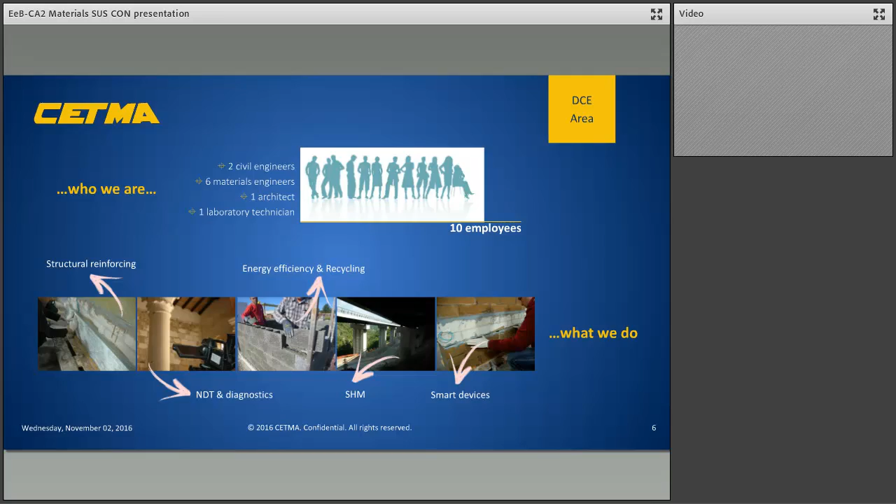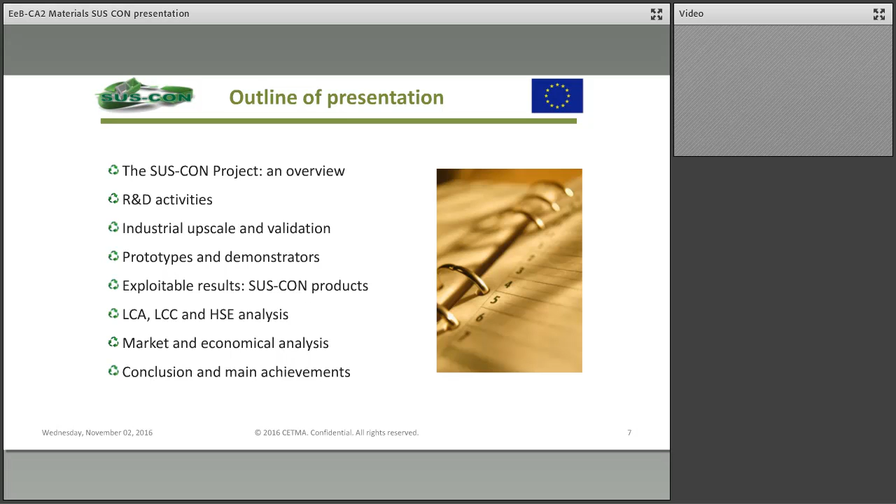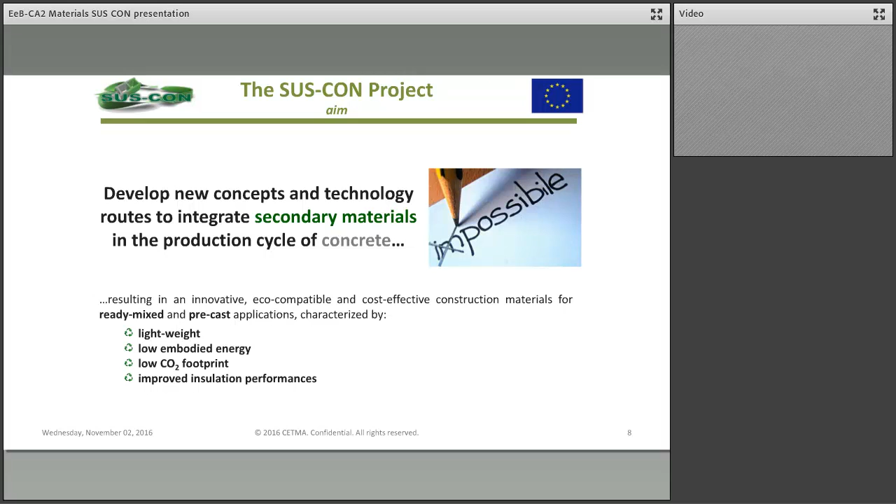What's the aim of the Suscon project? The aim was to develop new concepts and technologies to integrate secondary raw materials into the production cycle of concrete. This will result in a construction product usable for ready-mixed and precast applications, characterized by lightweight, low embodied energy, low CO2 footprint, and improved insulation performances.

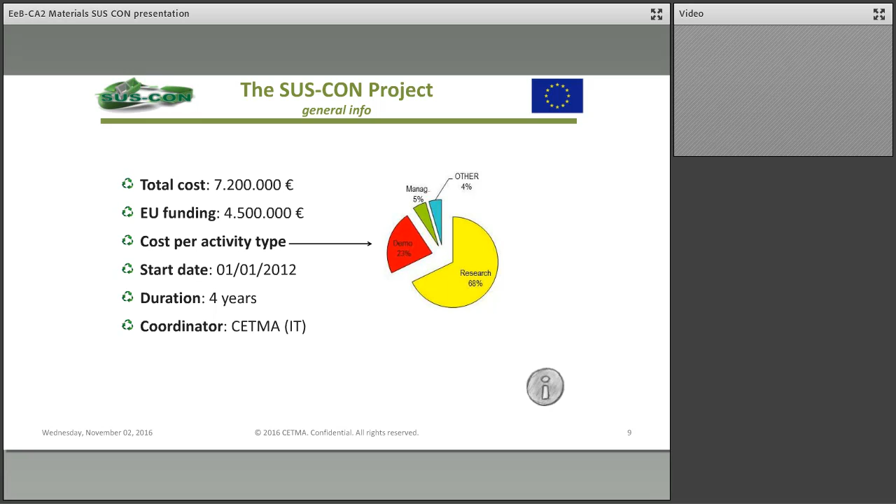Some general information: the project started in January 2012 and lasted 4 years, ending in December 2015. The total budget was about 7 million euros, with 4.5 million euros funded by the European Commission, and it was coordinated by CETMA.

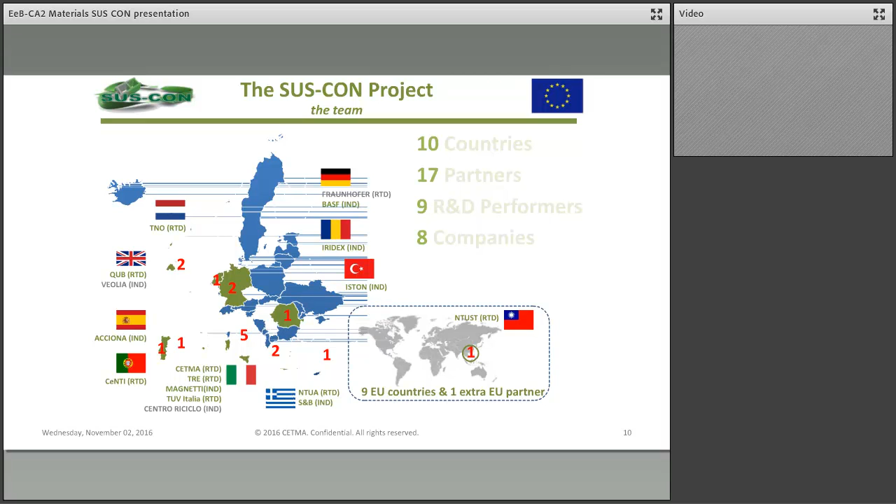We were 17 partners coming from 10 countries, 9 EU countries and 1 extra-EU country, with 9 R&D performers and 8 companies.

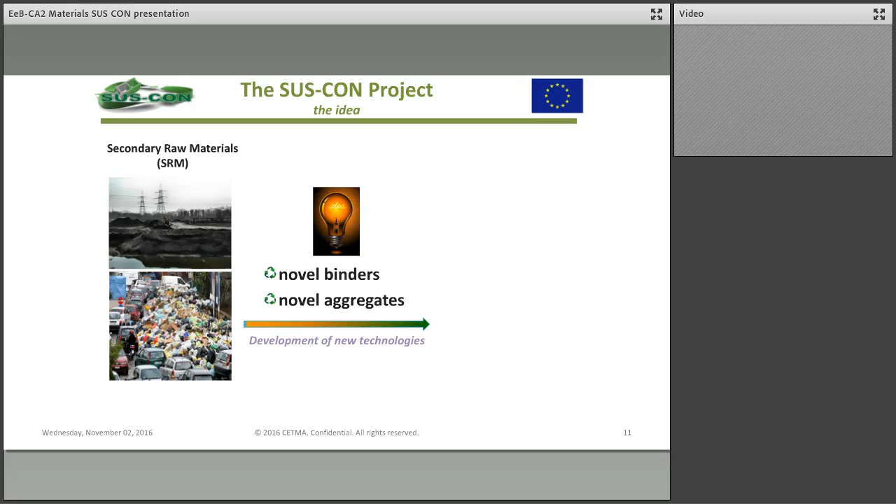So the idea of the SUSCON project was to take secondary raw materials, develop new technology to process and transform such secondary raw materials into novel binders and aggregates, and then combine such novel binders and aggregates from secondary raw materials into a sustainable and energy efficient lightweight concrete.

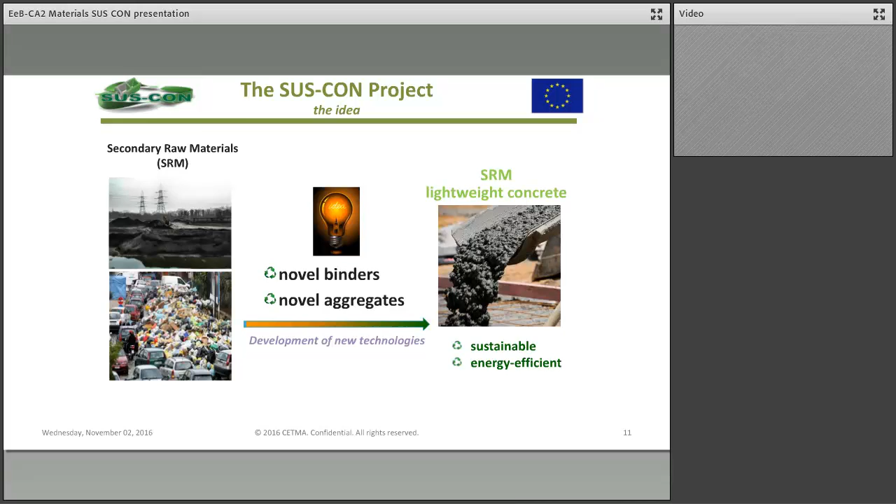The challenges of the SUSCON project were very ambitious: a 50% reduction of embodied energy, mainly through substitution of traditional binder with binder coming from secondary raw materials; improvement of insulation properties thanks to the use of lightweight aggregates; reduction of the CO2 footprint up to 50% thanks to the use of secondary raw materials; and as a consequence, cost reduction and development of 100% eco-sustainable concrete made with secondary raw materials.

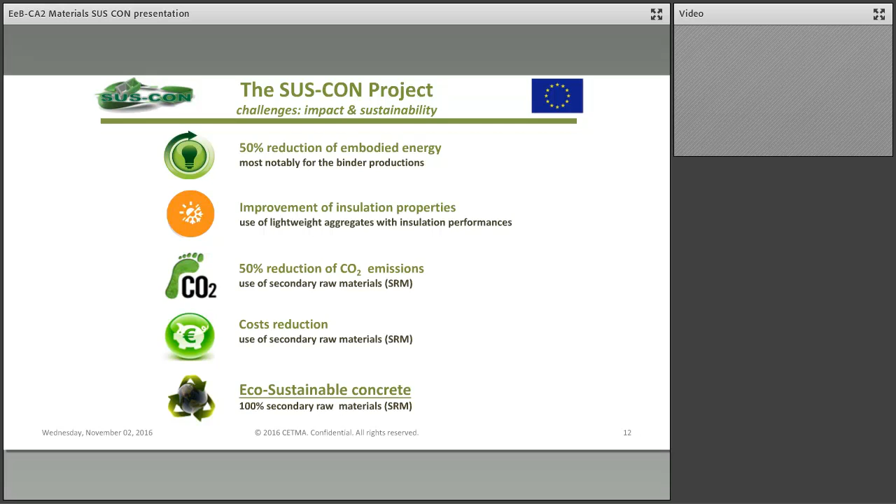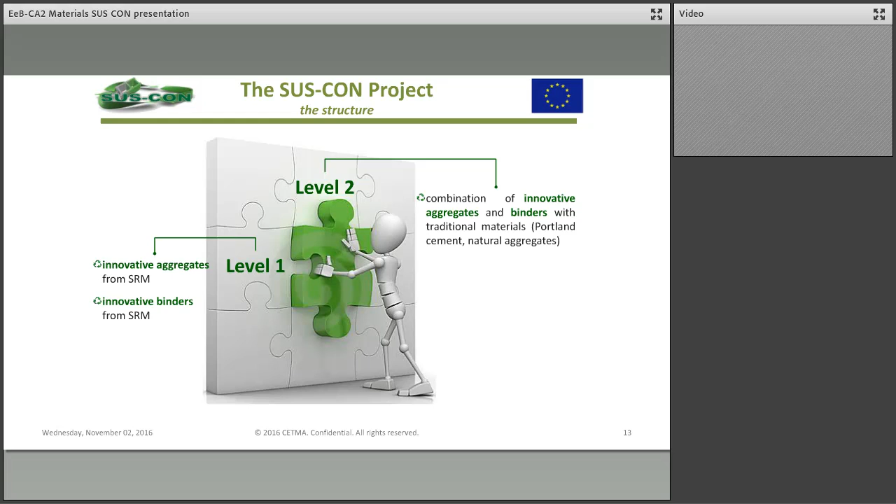The project was structured in 3 levels. The first level was about the development of innovative aggregates and innovative binder from secondary raw material. The second level was about the combination of innovative aggregates with traditional binder, and the combination of innovative binder with natural aggregates. The third level was about the combination of innovative aggregates and innovative binder from secondary raw materials into an eco-sustainable concrete made with up to 100% of secondary raw material.

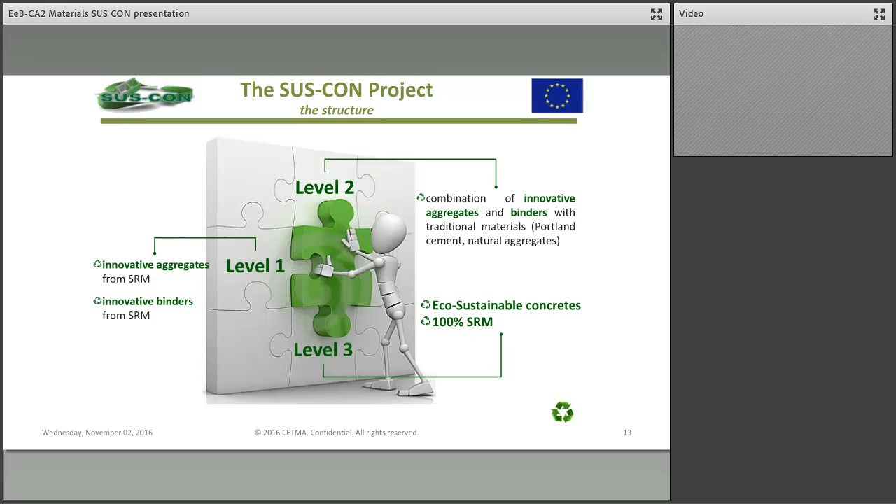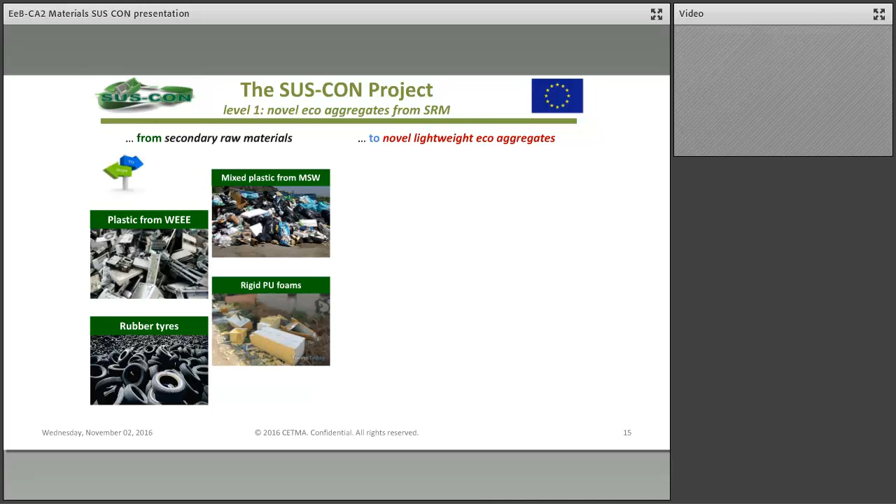Let's go through the development of novel eco-aggregates and binder from secondary raw material. What we have done: we have taken secondary raw material, usually landfilled or incinerated, and developed new technologies and processes to transform such secondary raw materials into lightweight aggregates with improved insulation performances, as you can see here.

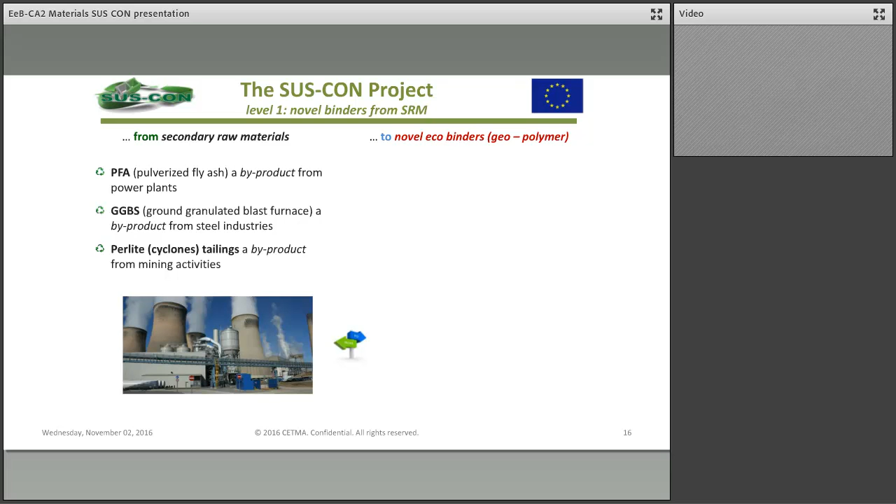We have done the same also from the binder side. We have taken some industrial byproduct, so PFA, GGBS, and perlite tailings, and again developed technologies and processes to transform such secondary raw materials into novel eco-binder, what we call geopolymers, that can be used for the replacement of traditionally ordinary Portland cement because of their cost effectiveness, low energy consumption, and reduced CO2 emission.

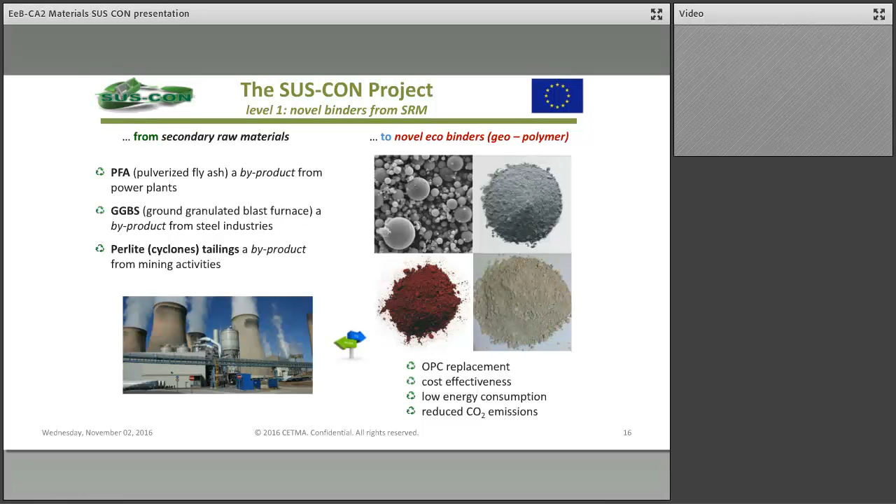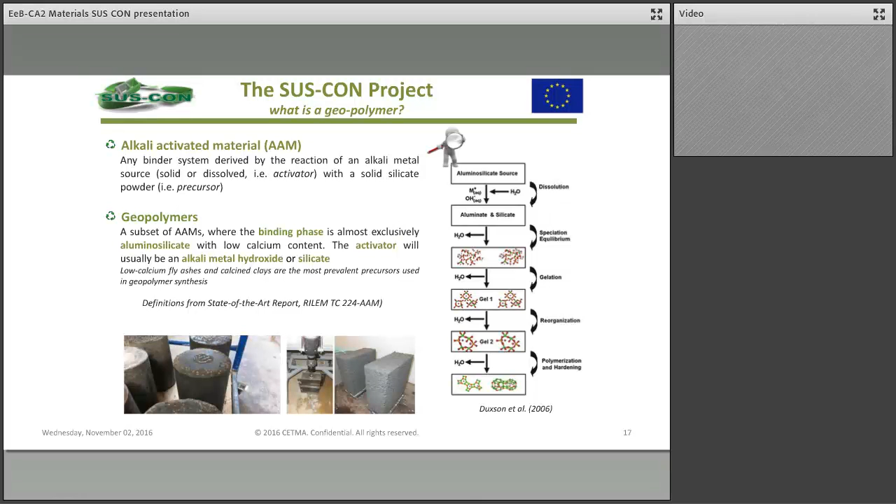Let's do a step back about what is a geopolymer. A geopolymer is a subset of the alkali activated materials, where for alkali activated materials we call any binder system derived from the reaction of an alkali metal source, the so-called activator, with a solid silicate powder, the so-called precursor. A geopolymer is a subset of the alkali activated materials, where the binding phase is typically aluminosilicate with low calcium content, and the activator is usually an alkali metal hydroxide or silicate.

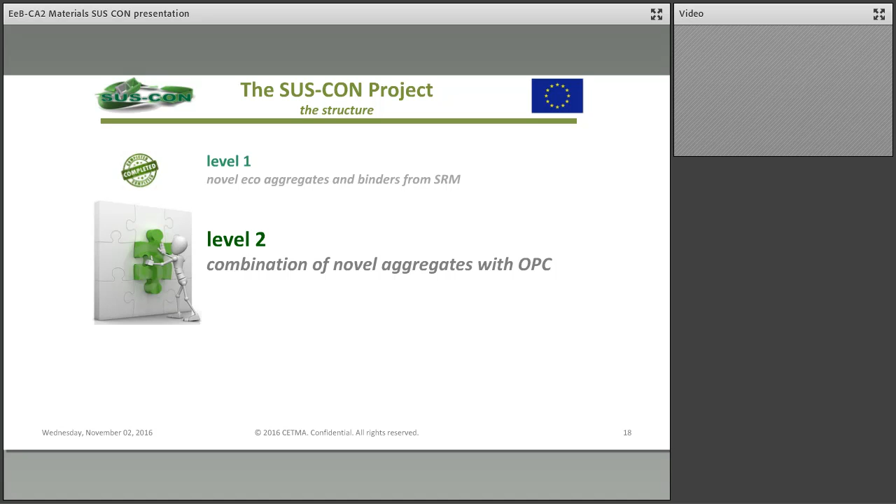After the development of eco-aggregate and binder from secondary raw material, the next step was the combination of a novel aggregate from secondary raw material with ordinary Portland cement.

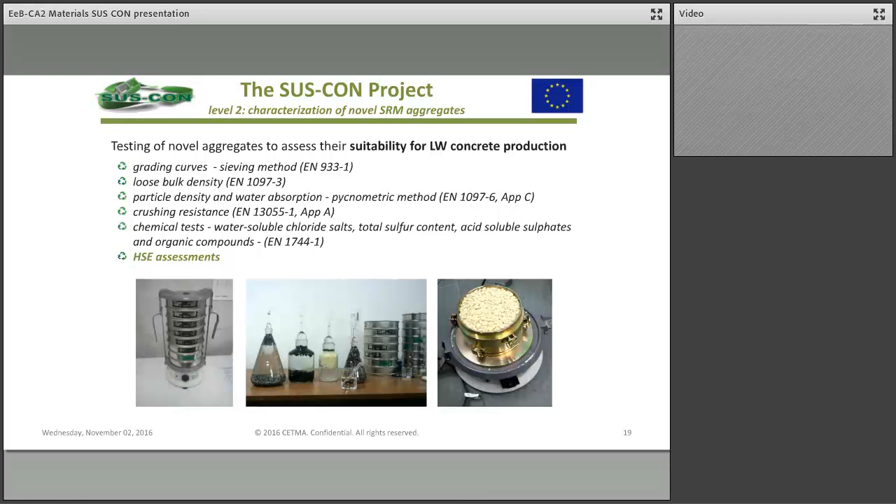What we have done: first of all, we have tested the suitability of lightweight aggregates from secondary raw material for the production of lightweight concrete. So we have performed a lot of physical and mechanical characterization, as well as also health safety environmental assessment of the process and product.

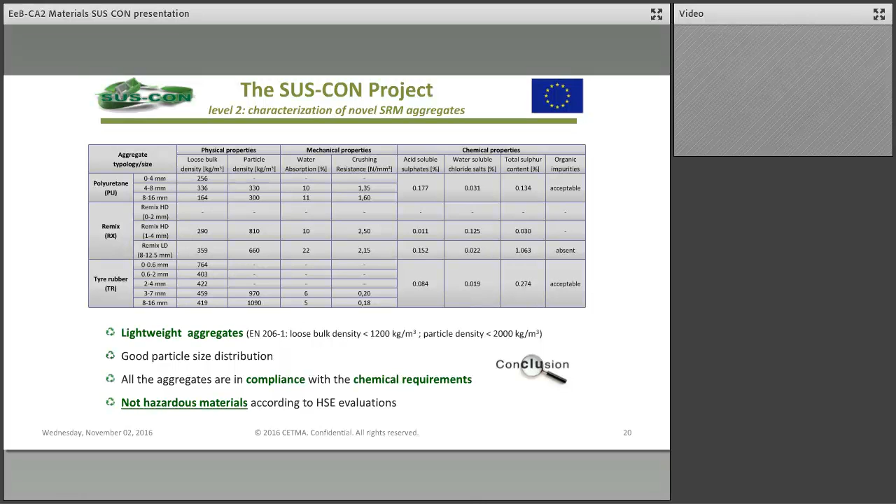This table summarizes the main results, but without going so much in the detail. Each aggregate resulted as lightweight with a good particle density, that is essential for a good mix design. Aggregates from secondary raw material also resulted in compliance with chemical requirements and not hazardous in terms of HSE, and this also is a crucial point for a future use in a real application.

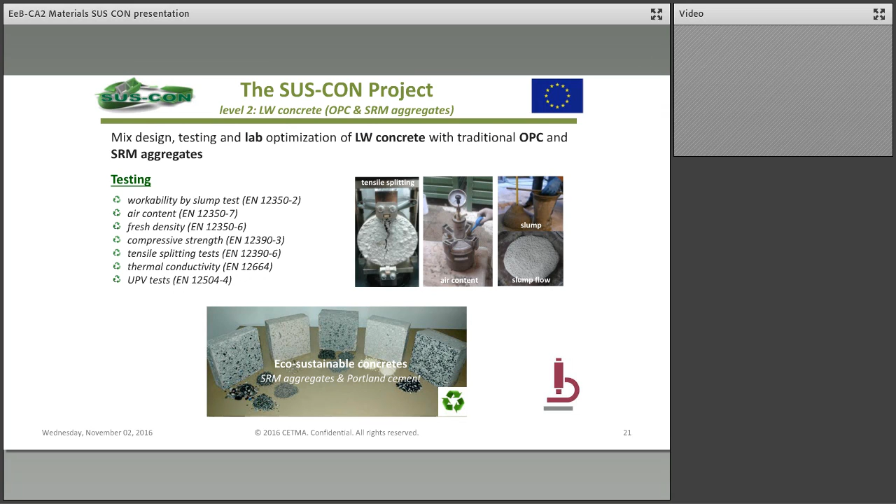Afterward, several lightweight concrete with aggregates from secondary raw material and ordinary Portland cement were designed and tested in terms of workability, air content, fresh density, compressive strength, tensile splitting strength, thermal conductivity, and the UPV test. At the end, we were able to develop at the lab scale some eco-sustainable concrete made of secondary raw materials and ordinary Portland cement.

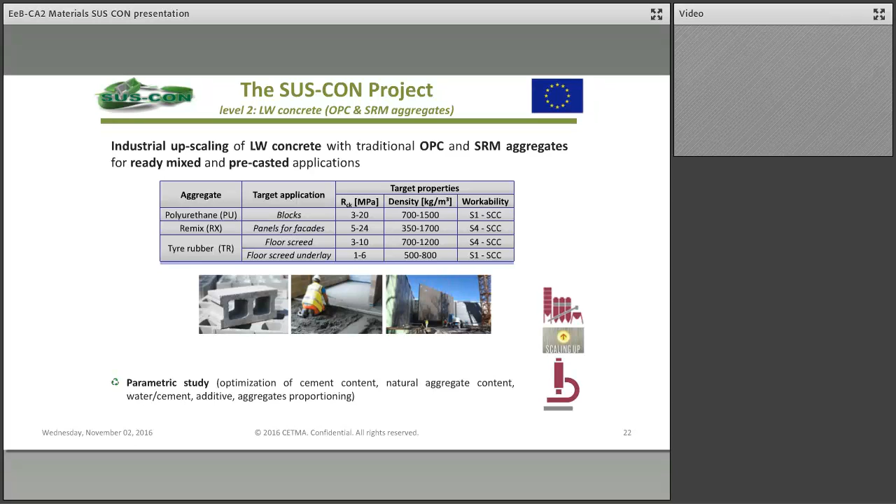Next step was the industrial upscaling of lightweight concrete made of traditionally ordinary Portland cement and aggregates from secondary raw materials for ready mixed and precast application. At this aim, we set the target performance that we have to obtain for target applications that were blocks, panels, screed, floor-screed and floor-screed underlay. A parametric study was performed in order to optimize cement content, aggregate content, water to cement ratio, additives, aggregates proportioning, and so on.

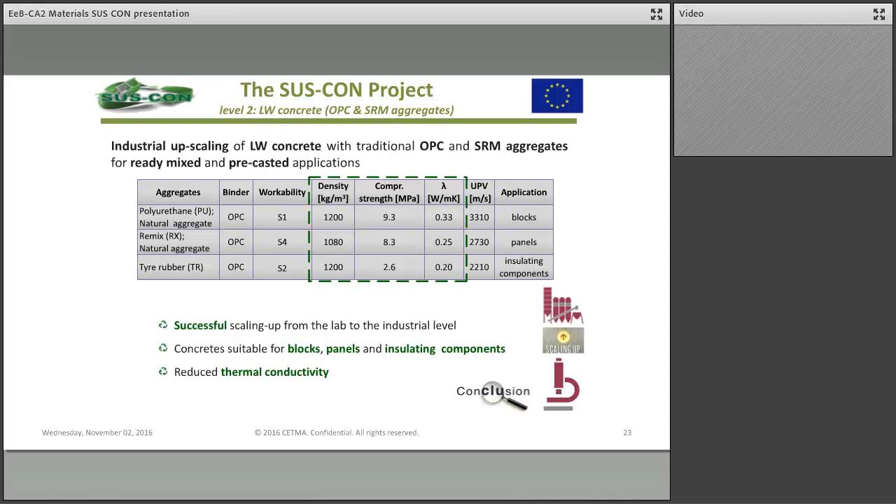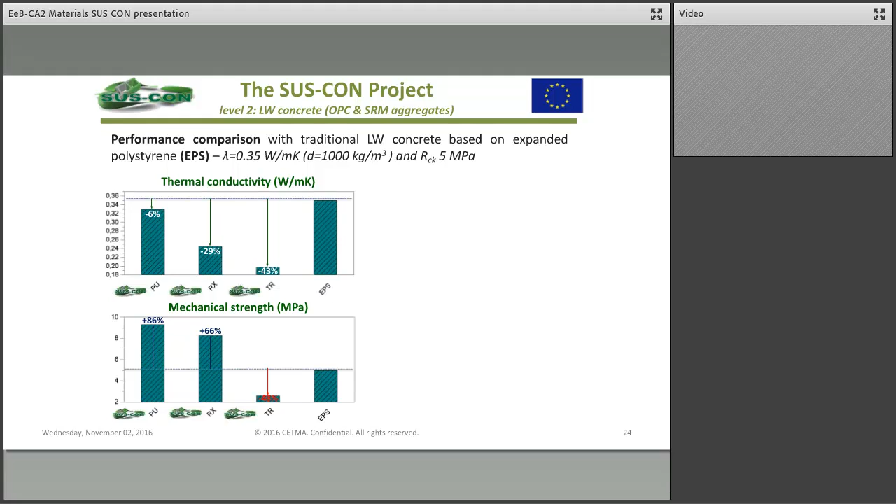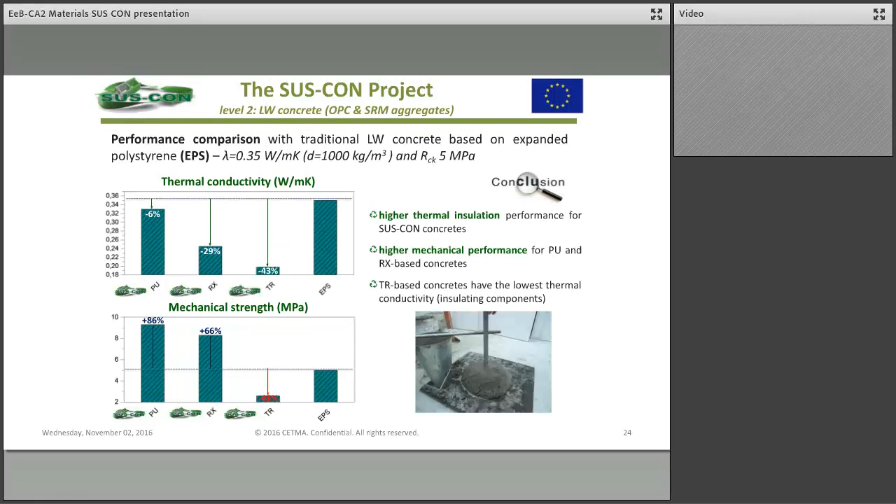In order to evaluate how good were the performances of our lightweight concrete with secondary raw materials, a performance comparison with traditional lightweight concrete based on expanded polystyrene was performed. As you can see in this picture, lightweight concrete with secondary raw materials aggregates resulted in higher thermal insulation properties up to 43%, and their mechanical performances up to 86% for a concrete based on polyurethane and mixed plastic scrap.

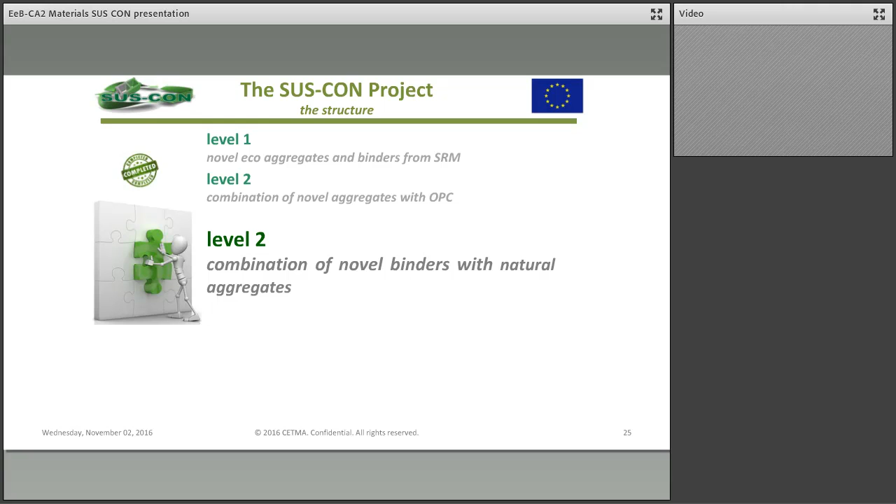The next step was to check the suitability of the novel binders from secondary raw materials to be used with natural aggregates. At this aim, physical and mechanical and chemical characterization of binders were performed, aiming to investigate the potential for geopolymerization.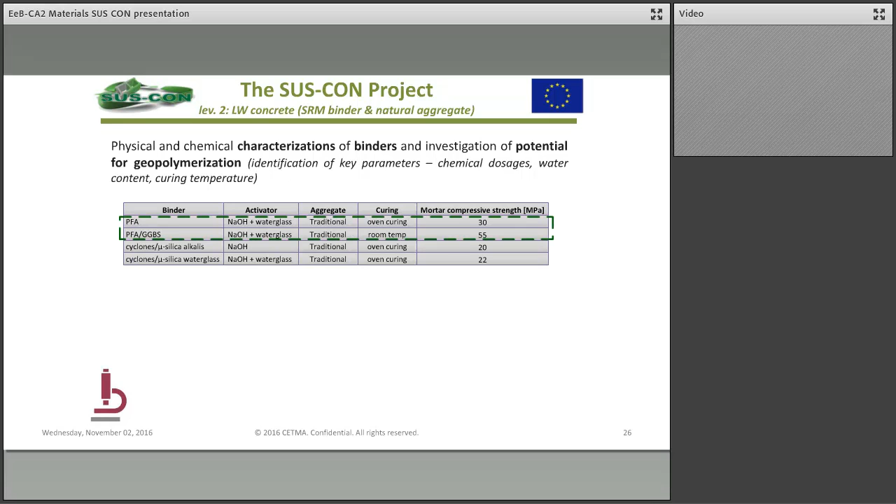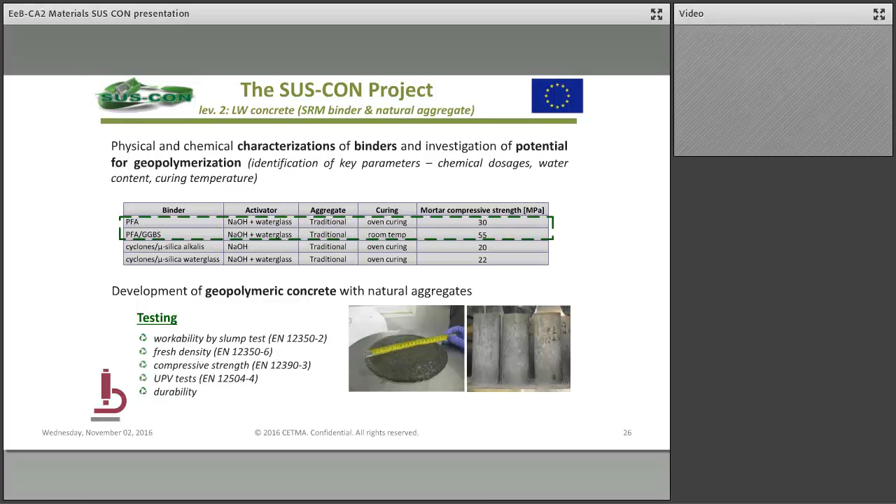A lot of tests were made in order to identify the process parameters for geopolymerization, and this was the main obtained results for PFA and GGBS based binders. We then developed a geopolymeric concrete made with binder from secondary raw materials and natural aggregates, and tested them in terms of workability, fresh density, compressive strength, UPV test, and durability.

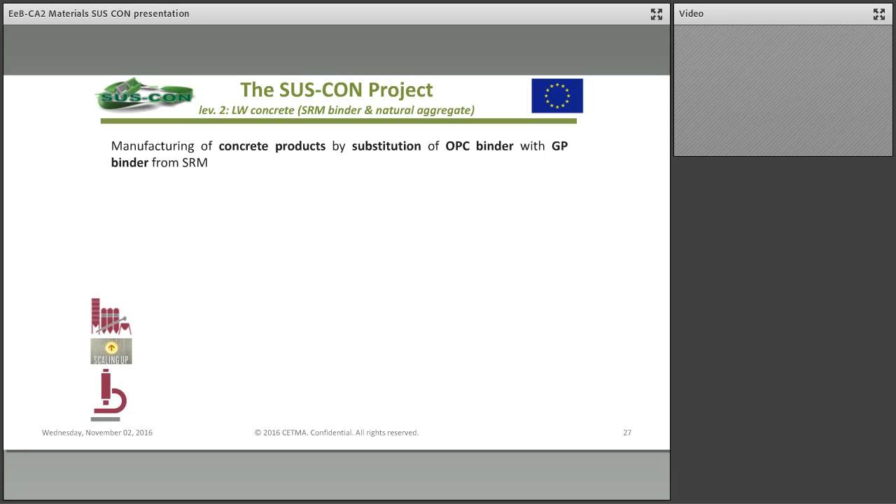Also in this case, we evaluated the chance to upscale such concrete from the lab scale to the industrial plant. Several concrete products were produced by substituting ordinary Portland cement binder with the SUS-CON binder from secondary raw material for applications like facade panel, building blocks, and aerated autoclaved concrete. As a result, the replicated concrete products were fully conformant to existing technical prescriptions.

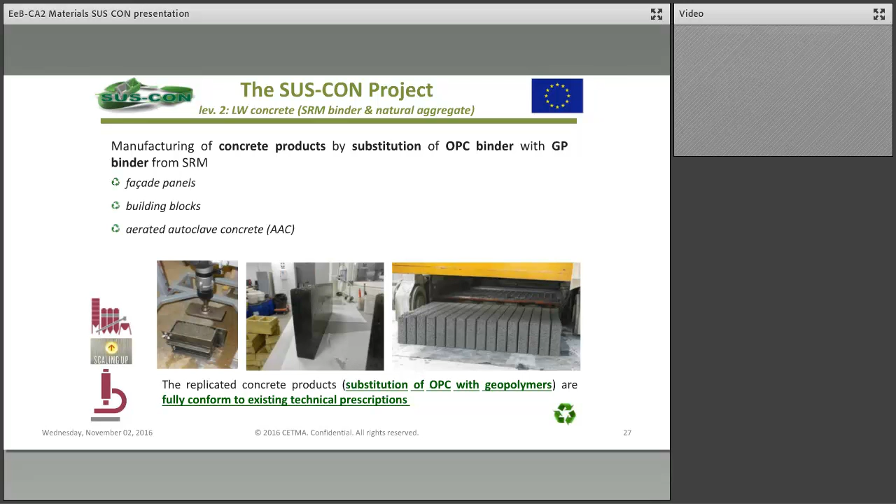At the third level, after the development of the novel eco aggregates and binder from secondary raw material, and the combination of novel aggregates with ordinary Portland cement and of novel binders with natural aggregates, the final step was to combine aggregates and binder from secondary raw material in an eco-sustainable concrete with 100% secondary raw material.

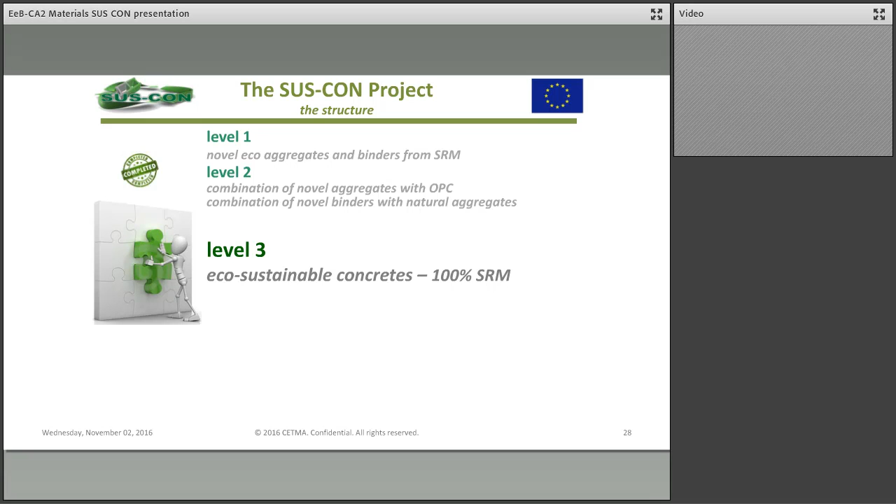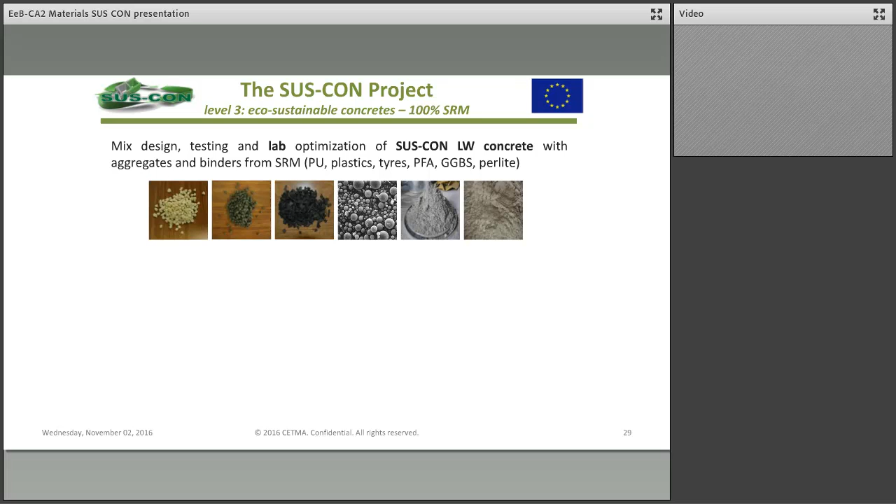So SUS-CON lightweight concrete with aggregates and binder from secondary raw material were designed and tested, targeting specific products like screed, blocks, and panel.

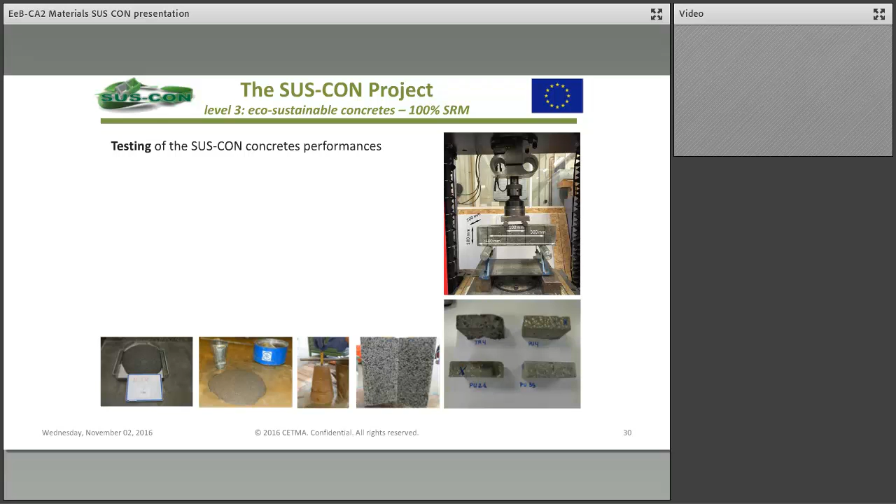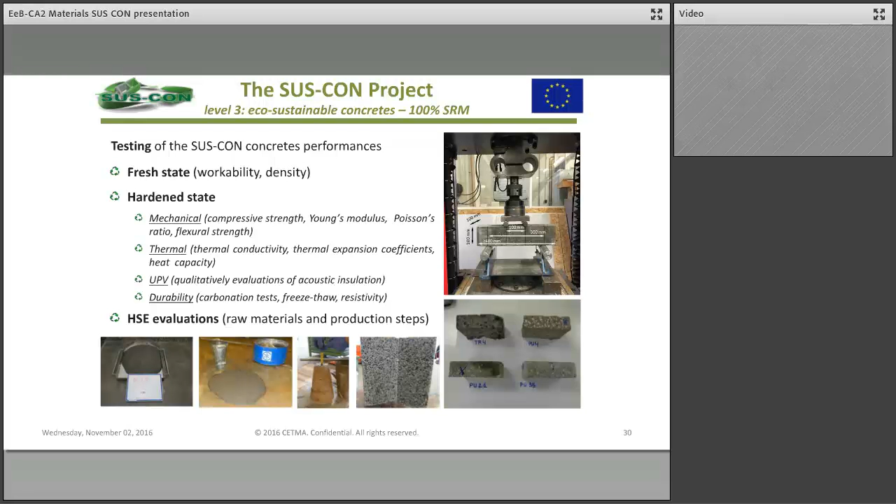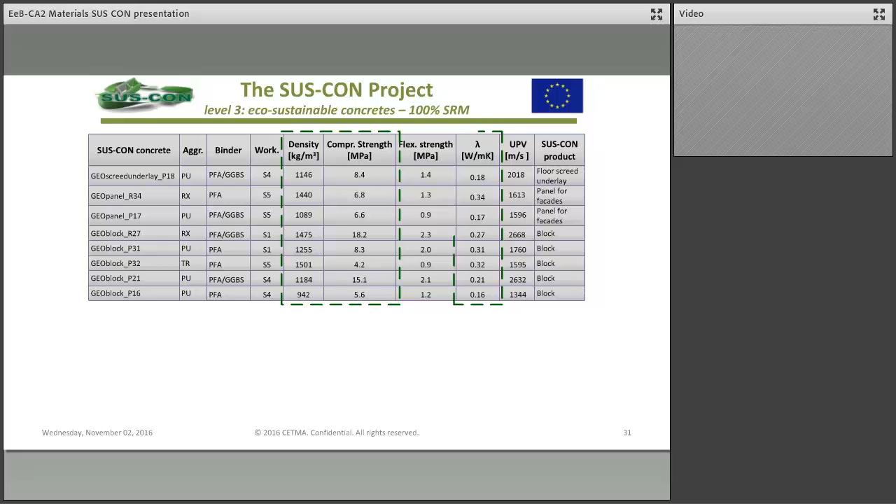These are the main results we obtained on the Suscon products. Very good results were obtained both in terms of compressive strength, up to 18 megapascal, and thermal insulation properties, as low as 0.16. So, innovative concrete based on 100% secondary raw material from both the aggregates and the binder side were successfully optimized for ready-mix and precast application and resulted in improved insulation performances, and also resulted as not hazardous after an HSE analysis of raw materials and production processes.

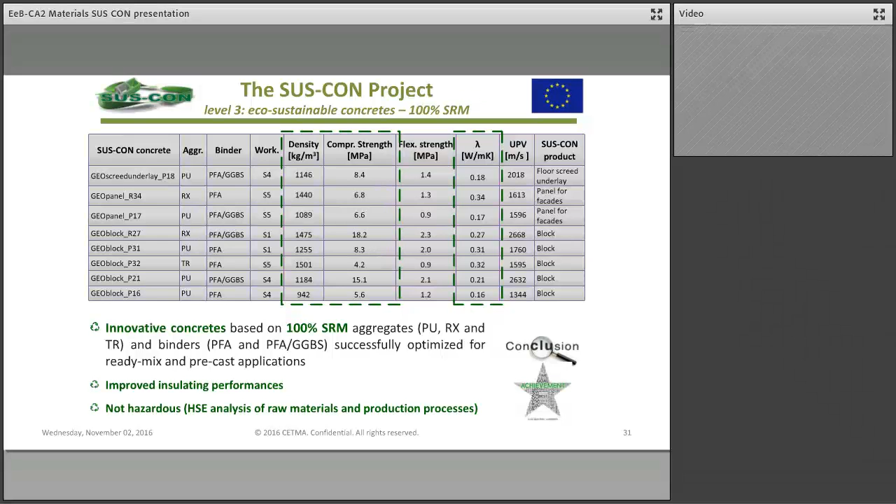Afterwards, several Suscon precast components, blocks and panels, were manufactured in the plant with the aim of testing the performances in terms of mechanical resistance, thermal and acoustic insulation, and fire resistance.

One of the main achievements of this upscale was that the Suscon product production is highly compatible with existing concrete production processes, so minimized equipment costs are required.

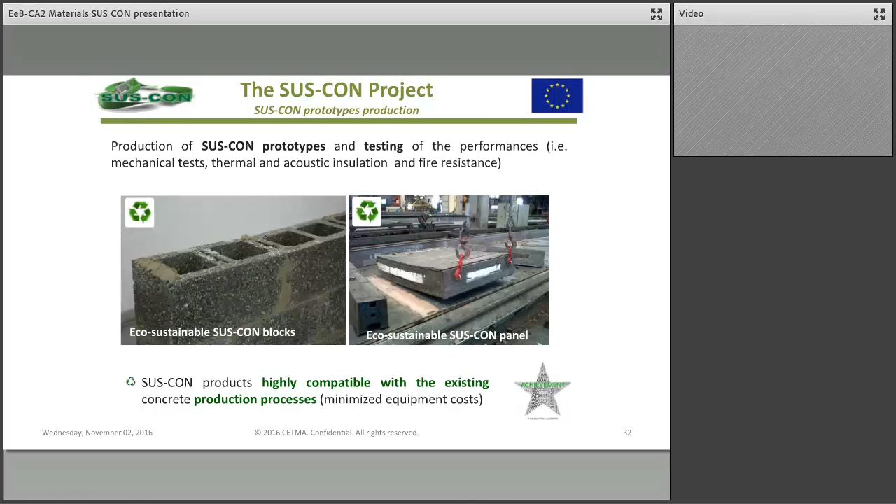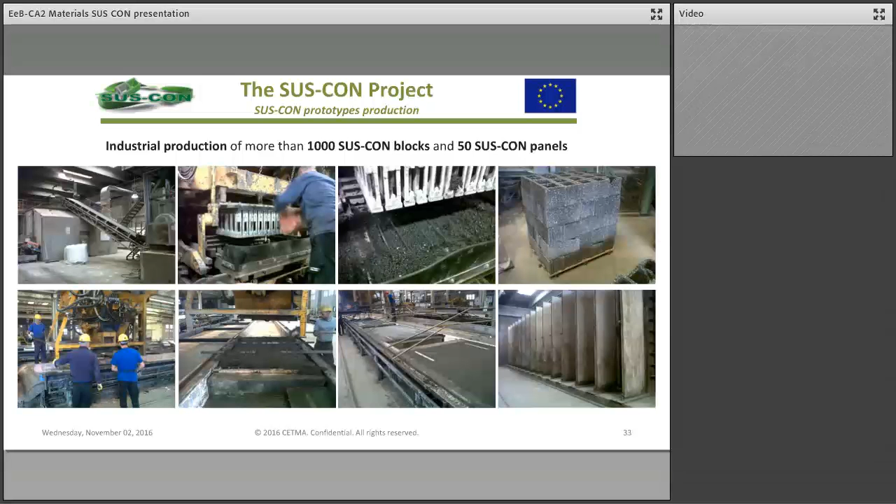In terms of characterization of such prototypes, we found that the Suscon blocks have a reduced U value that is half of the reference commercial block, and the Suscon panels have an improved fire resistance that is 4 times higher than the reference commercial panel.

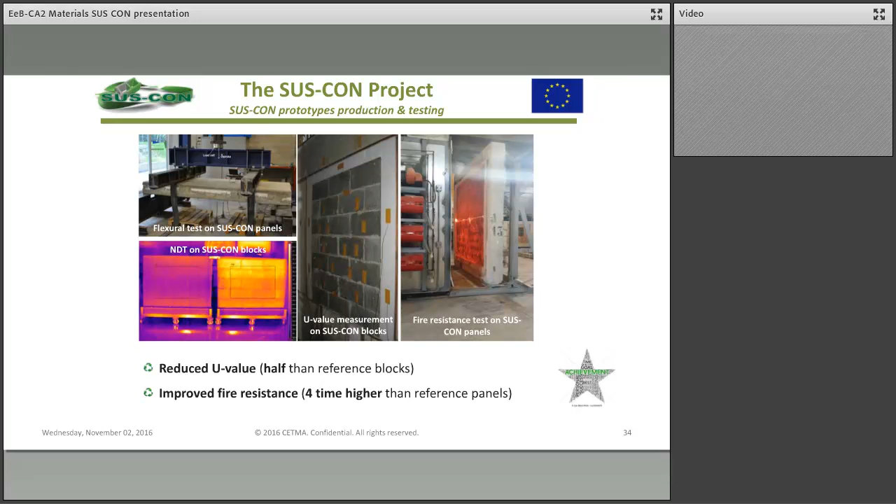Suscon panel have fire resistance that is EI 240, while reference commercial panel have a fire resistance that is EI 60.

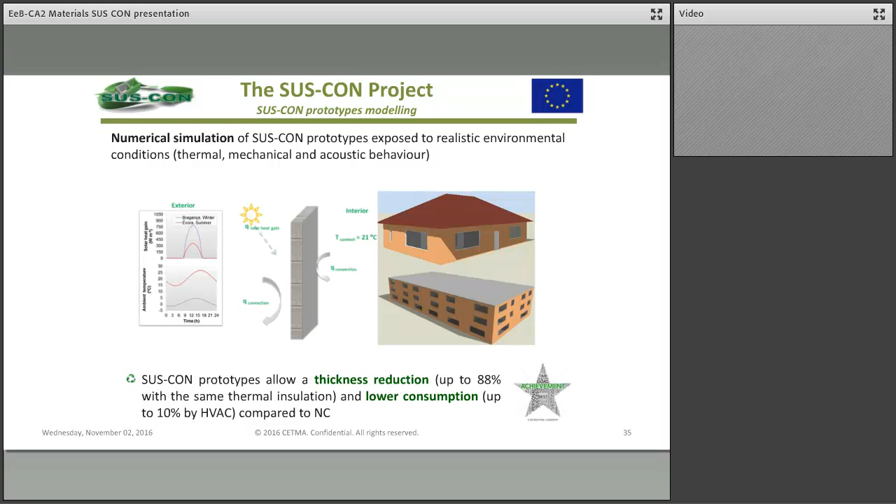We also performed numerical simulation of Suscon prototypes exposed to realistic environmental conditions, and we were able to conclude that Suscon prototypes allow a thickness reduction up to 88% with the same thermal insulation, and a lower consumption up to 10% compared to normal concrete.

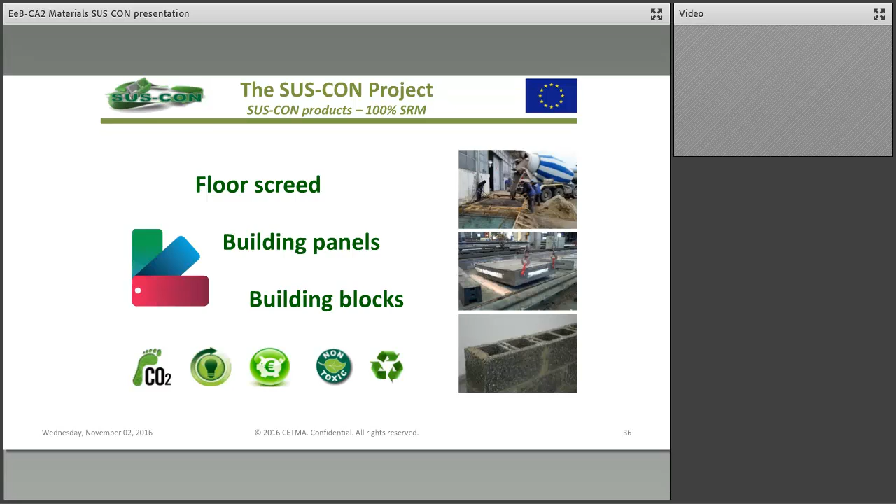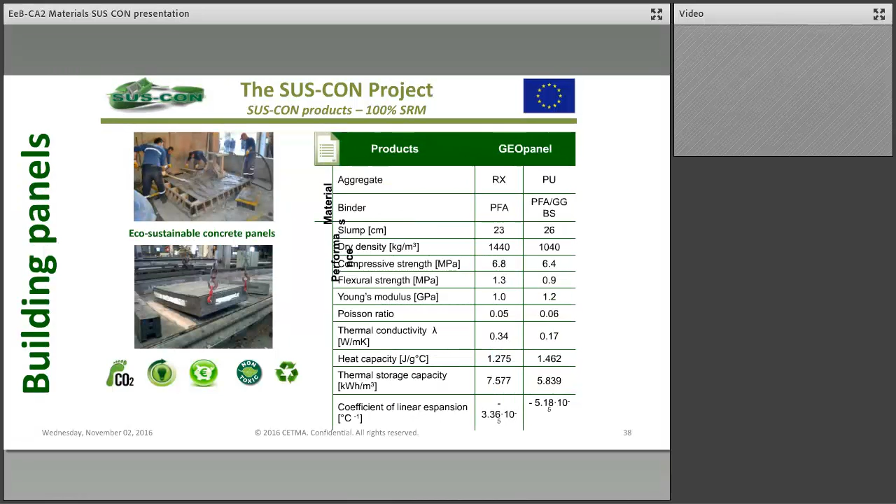and this is the data sheet for the building panel, and this is the data sheet for the building blocks.

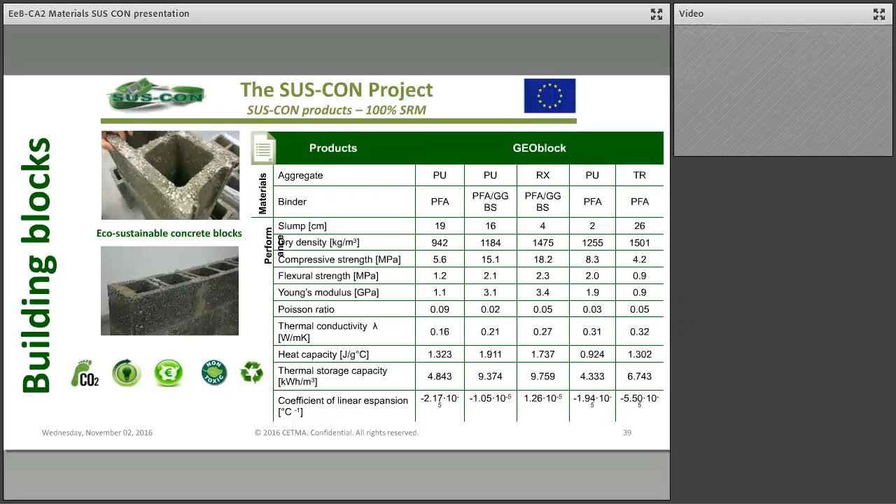For each product, we have several types of Suscon components, as we have used different types of aggregates and different types of binders. So, for example, at the end of the Suscon project, we had 5 types of blocks, 2 types of panel, and 1 type of screed.

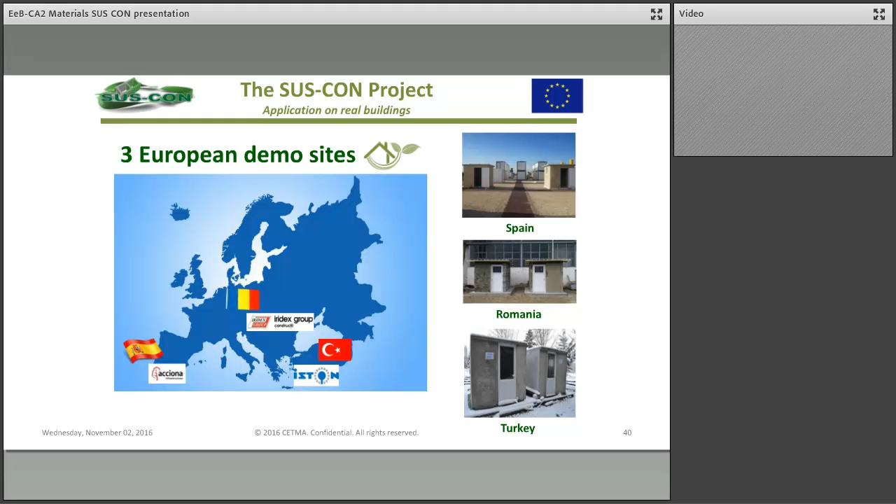The final step was the demonstration in real scale demo sites. We had the chance to validate the Suscon outcomes in 3 European regions: in Spain, in Turkey, and in Romania, as you can see in this picture.

This is the demo in Spain, where we used Suscon blocks and Suscon panels. Reference mock-ups made with traditional commercially available building components were also constructed, in order to make a comparison during the service life.

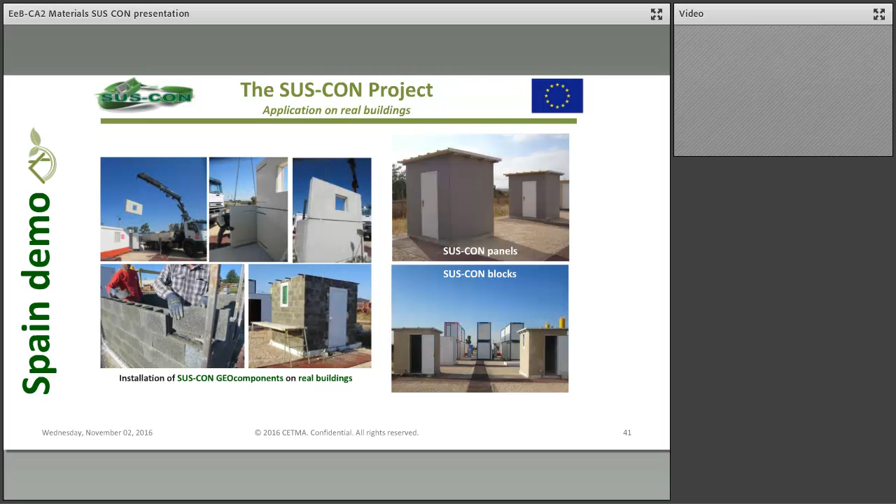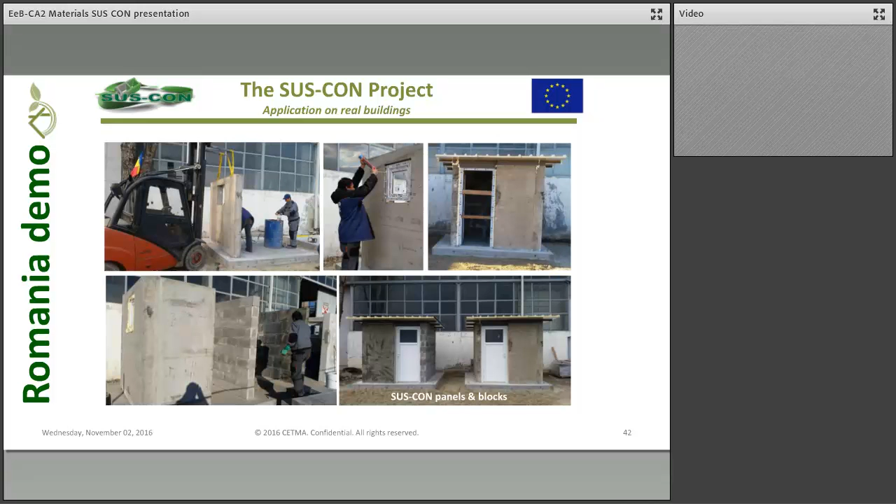This is some picture about the installation in Romania of both panel and blocks, Suscon blocks and panel. And this is some picture about the installation in Turkey.

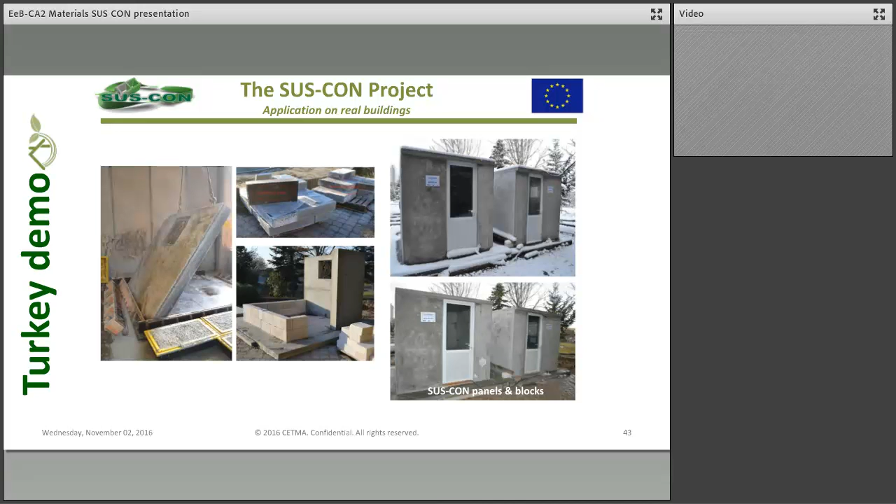We performed some monitoring of the mock-ups in order to evaluate the in-service installation performances of our Suscon project, and we developed some testing procedures in order to evaluate the global thermal efficiency of the new structure, as well as to compare acoustic insulation of Suscon products with the reference one.

In the end, we were able to verify that Suscon products have improved thermal insulation with respect to commercially available reference products and comparable acoustic insulation performances.

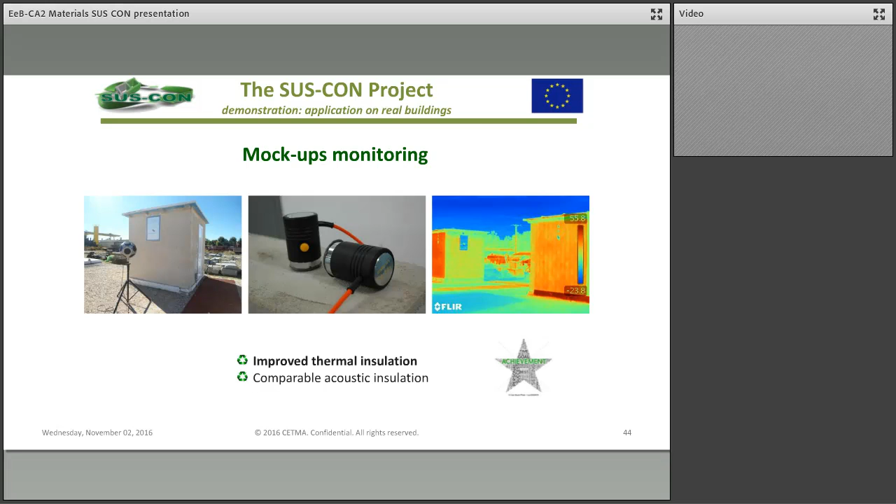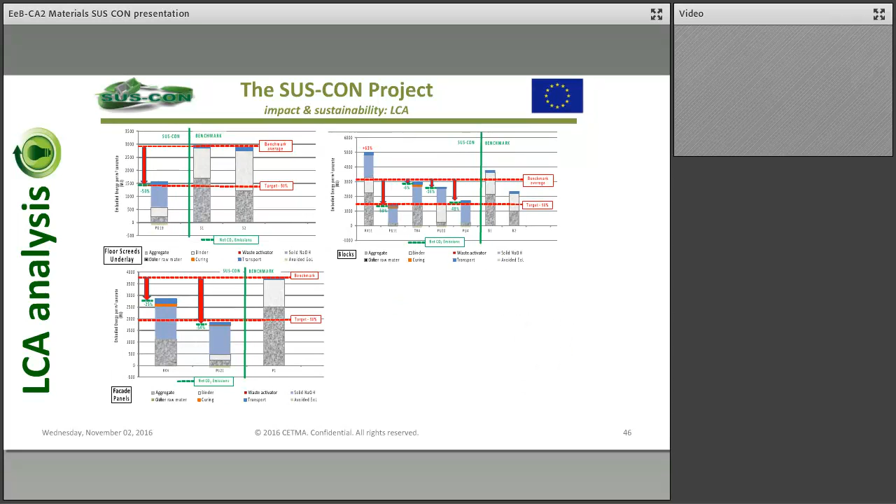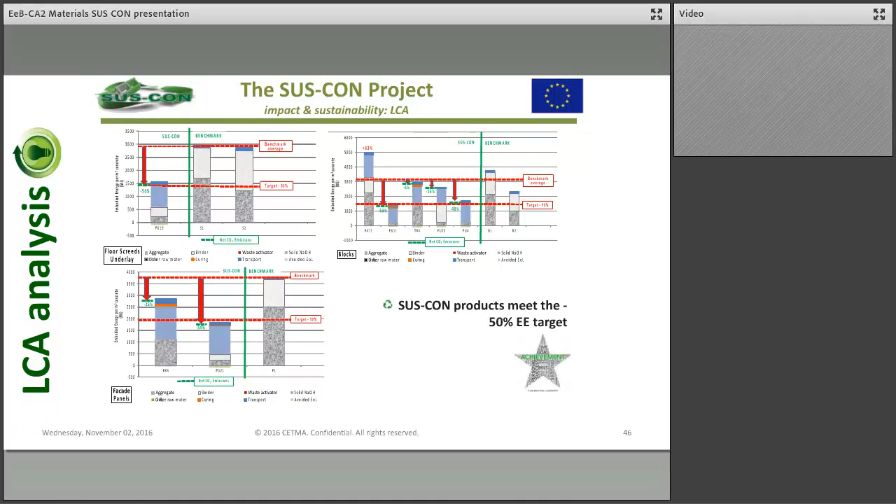We have also performed LCA and LCC analysis to evaluate the impact and sustainability of the Suscon project for future application in industrial plants. According to the LCA analysis, some Suscon products can meet the target of 50% CO2 reduction with respect to reference products based on ordinary Portland cement, and meet the reduction of 50% of embodied energy with respect to traditional commercial products.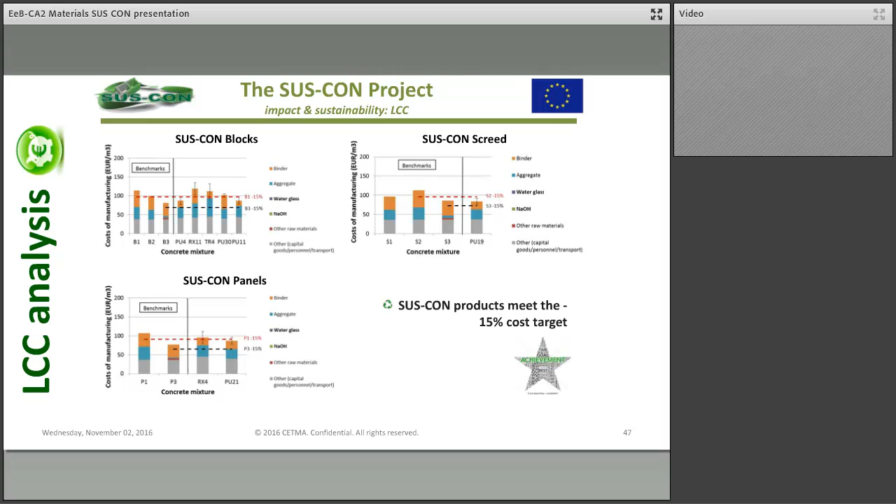We have also performed a life cycle cost analysis to evaluate the global costs for production of the new SUS-CON product, from raw material to production. In the end, we were able to verify that the SUS-CON product can meet the target reduction of 15% of the cost with respect to traditional commercial products, with the same installation performance.

According to the HSE analysis, all SUS-CON products are non-hazardous and non-toxic, both in terms of raw materials and processes. This is another exploitable result of the project.

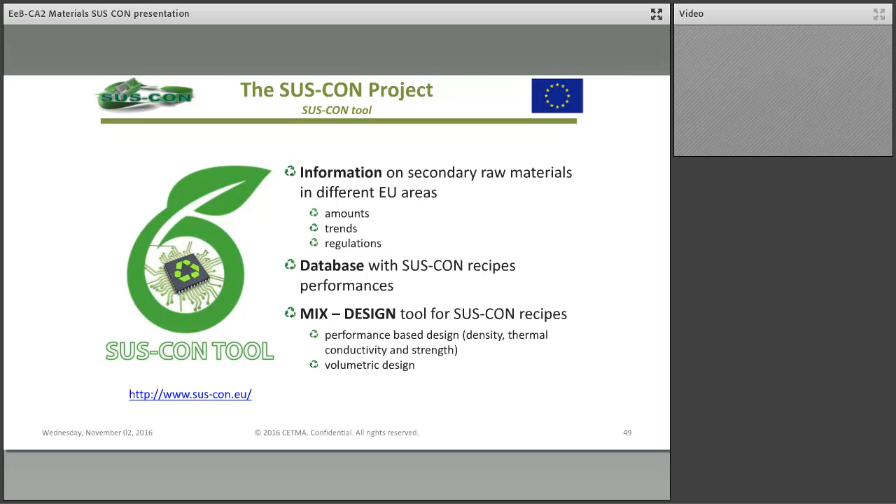We have made it available on the website. We have called it the SUS-CON tool. It's a sort of app you can use to get information on secondary raw materials in different EU areas, in terms of amounts, trends, and regulations in different European regions. You can also find a database with SUS-CON recipes and their performances, and it can be used as a mix design tool for SUS-CON recipes. With two main characteristics, you can perform performance-based design in terms of density, thermal conductivity, strength, but also traditional volumetric design.

So let's come now to the main achievement of the project. The main aim of the SUS-CON project was to develop sustainable, innovative, and energy-efficient concrete using secondary raw materials. To this aim, several eco-sustainable concrete recipes based on innovative aggregates and binders from secondary raw materials have been suitably designed and developed, targeting specific products like blocks, panels, and screeds.

50 panels and 1,000 blocks for precast application, and ready-mixed screed SUS-CON prototypes, have been industrially produced and tested, resulting in a reduced U value that is half that of reference commercial blocks, improved fire resistance that is 4 times higher than reference commercial panels, and comparable mechanical performance.

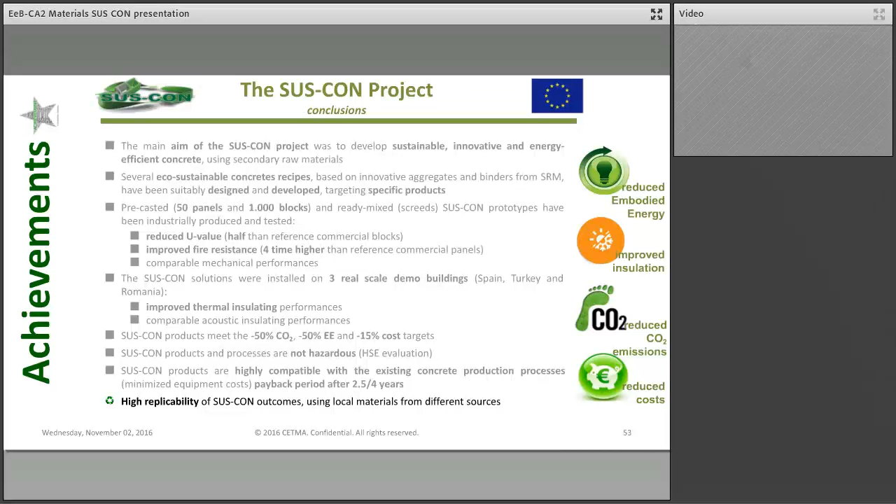SUS-CON products met the target reduction of 50% of CO2 emission, 50% of embodied energy, and 15% of cost. SUS-CON products and processes are not hazardous after the HSE evaluation, and SUS-CON products are highly compatible with existing concrete production processes, so minimal equipment costs are required, with payback period in the range of 2.5 to 4 years. Last but not least, we have verified the high replicability of the SUS-CON outcomes using local materials from different sources for the demonstration activities.